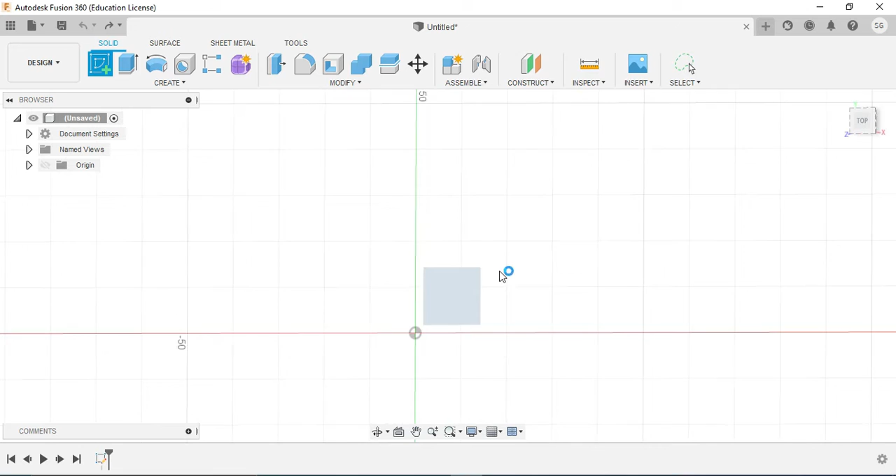Open Fusion 360 and go for create a sketch. Now select the plane. Suppose if we select here, this is the top plane. You can also select from here - this is front, right, top. So we need the top plane here, so select on the top plane.

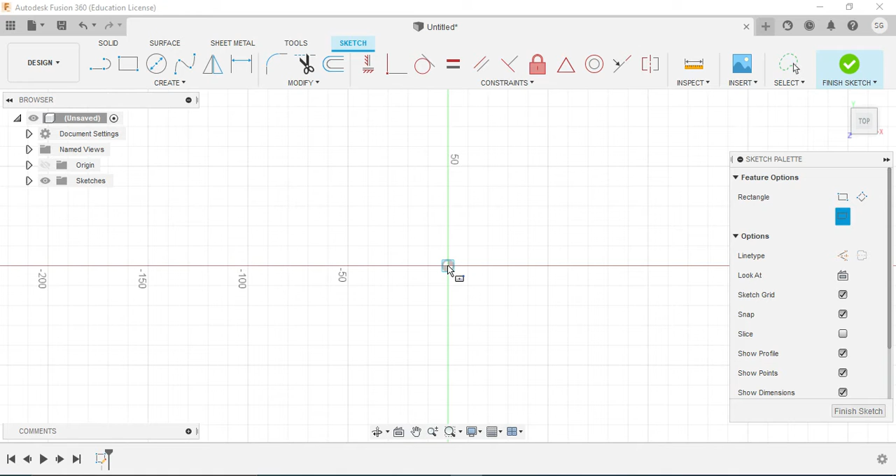Now go for the rectangle. This is a 2 point rectangle, 3 point, and this is a center point rectangle. Select this center point rectangle and click on center, and the dimensions are 44 by 34.

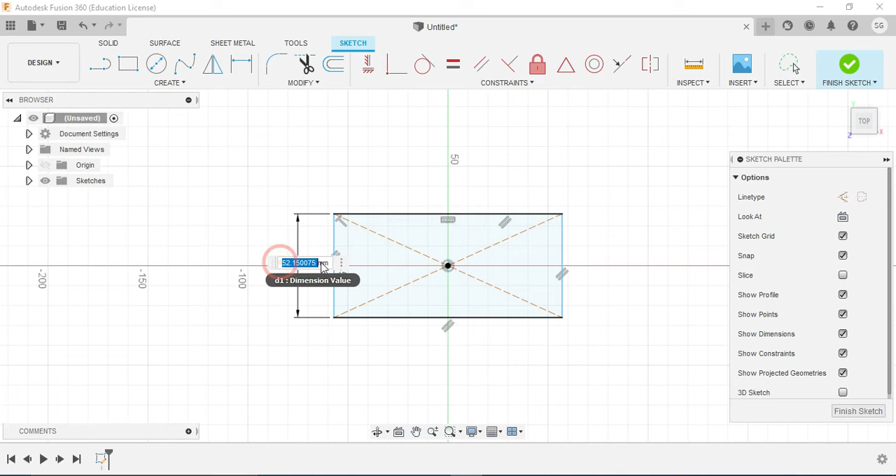Right click and go for sketch dimensions. So this is about 34 mm, and this is 44 mm.

Now go for the finish sketch. Go for the extrude, and the thickness is about 6 mm. So give the thickness 6 mm.

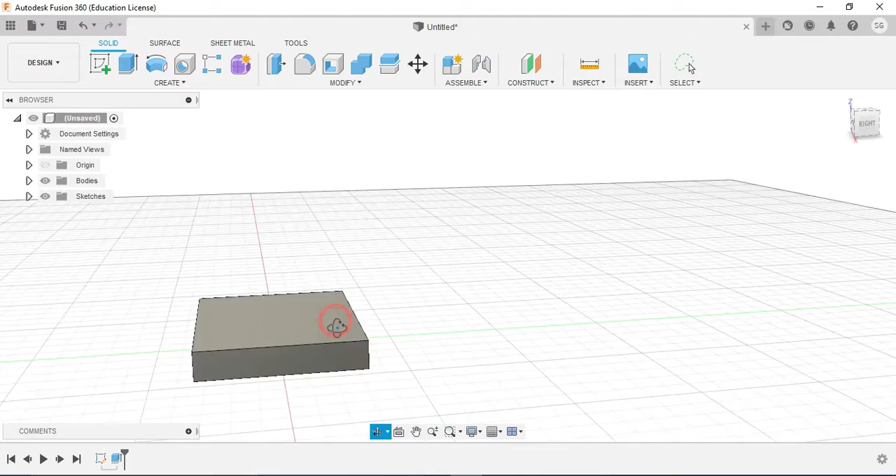Now click on this orbit option, and press and hold the left key of the mouse and drag the mouse to rotate this model 360 degrees. Now just press the scroll button to disable this orbit option.

Or unselect that. Now we need to make these two ribs of 8 mm thickness, and the height is total height 48 minus 6, that is 42. So 48 and 8 here.

Go for the sketch and select this surface. Go for the rectangle, select here and this two, right click on it and go for sketch dimensions.

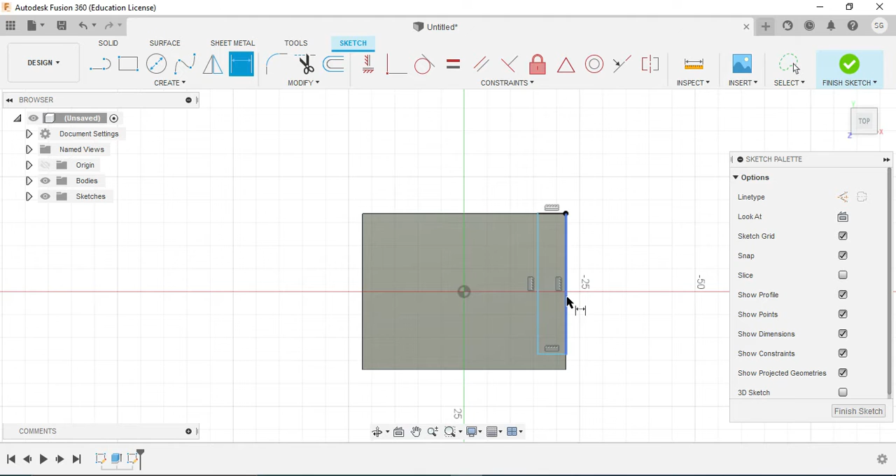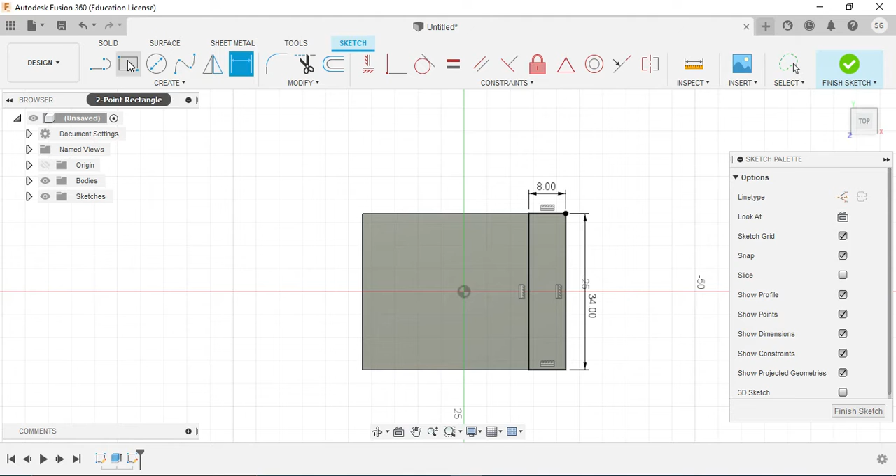Okay, this is 34, and this is about 8 mm thickness. You can also mirror it.

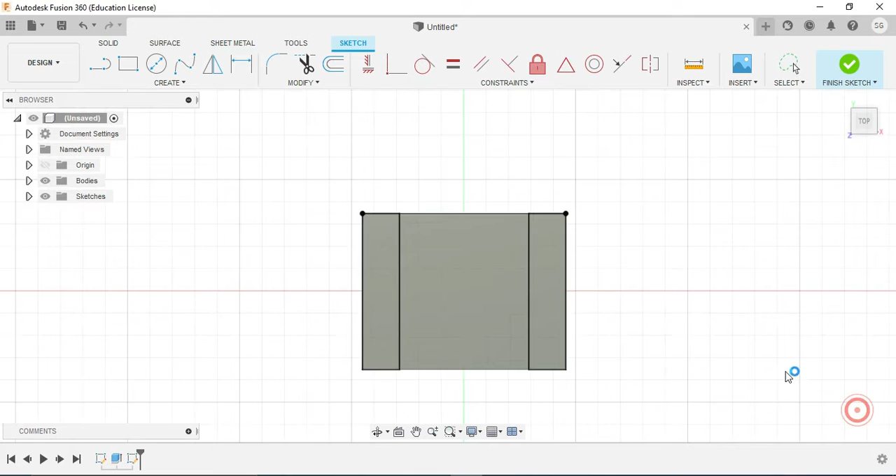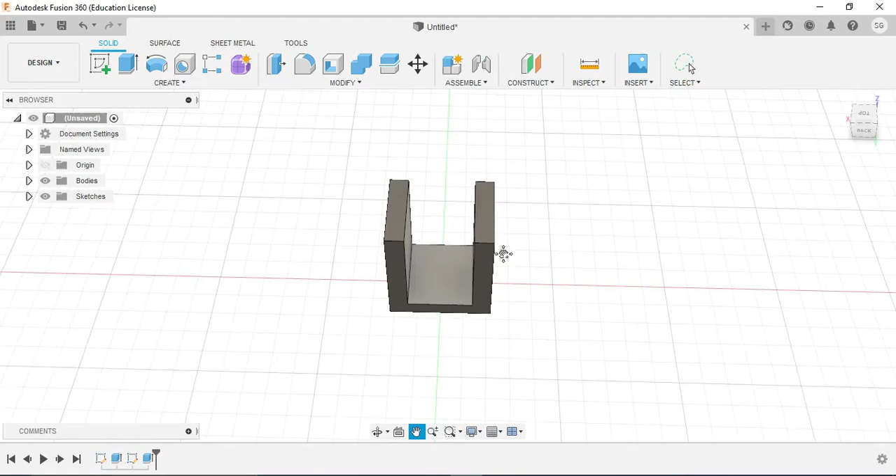Now go for the extrude, press Ctrl button and select these two ribs, and select on the extrude and give it 42 mm. To just drag it, press the scroll button and drag the mouse to drag this component or the solid.

Now we need to make a circle here or hole. So just to see the diagram, from the bottom surface it is 20 plus 6, that is 26 mm height, the center of the circle.

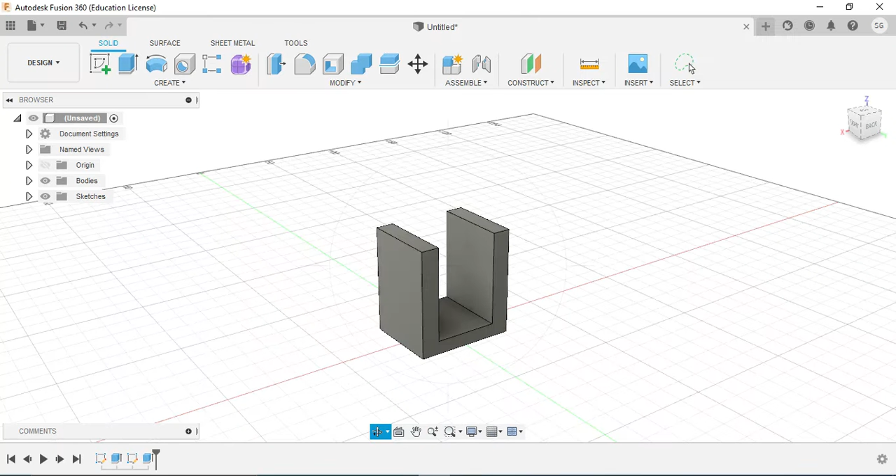So go for create a sketch, select this surface and go for the circle, and the diameter is about 24 and 14 mm.

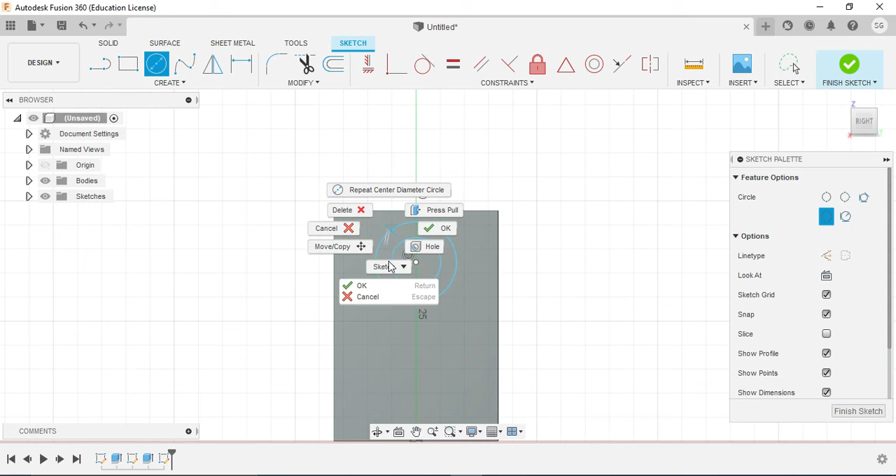Right click and go for sketch dimensions. This is 24 and another one is about 14 mm.

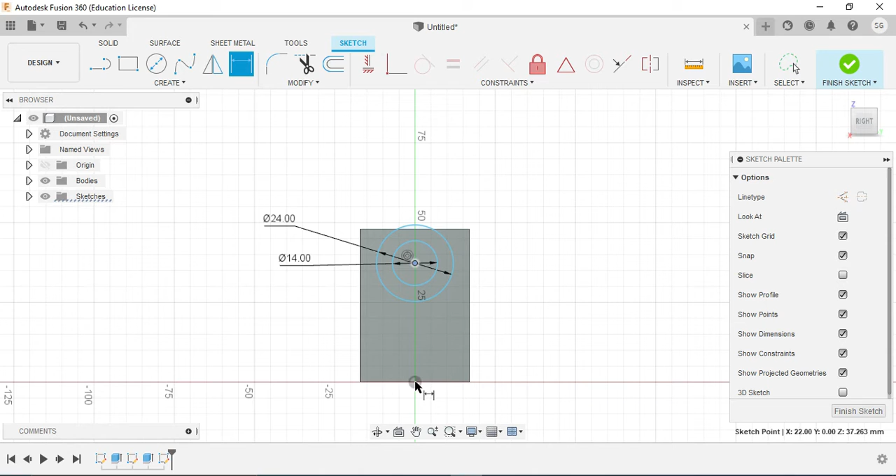Now select this center of the circle and the bottom line, and this height is 26 mm. Now finish the sketch.

Now go for the extrude, and the extrude is about 13 mm.

So there is no hole, we need to make the hole. As you see here, there is a hole. So select this surface and go for the extrude. Even though give the dimensions, suppose 8 mm, or just hold this and drag this to make the hole.

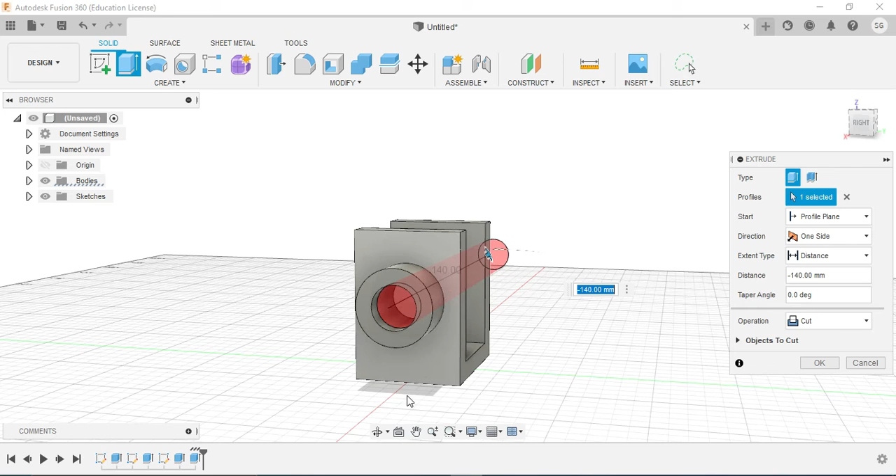See, or just give the through hole. You can see here all. Extent type is just give the all, or till to object. That's according to our requirement.

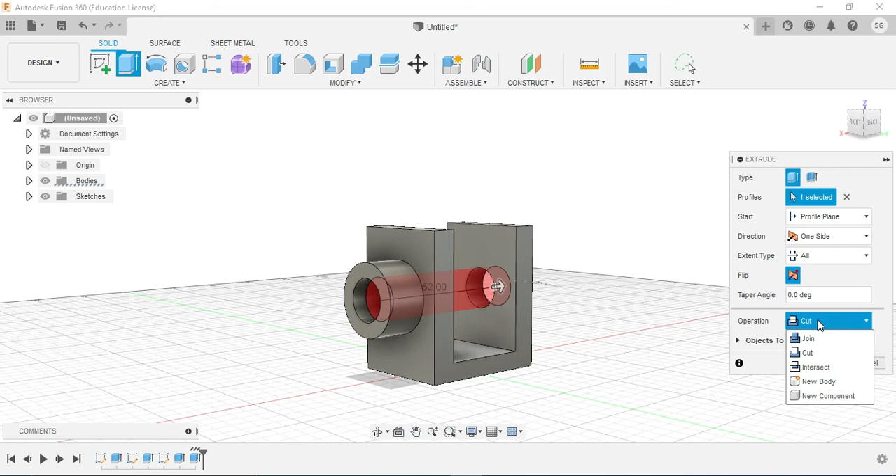Just use that. And okay, even though if you need to make this solid, just use the operations as join, cut, intersect, new body. So we are going to remove the material, so select the cut option and okay it.

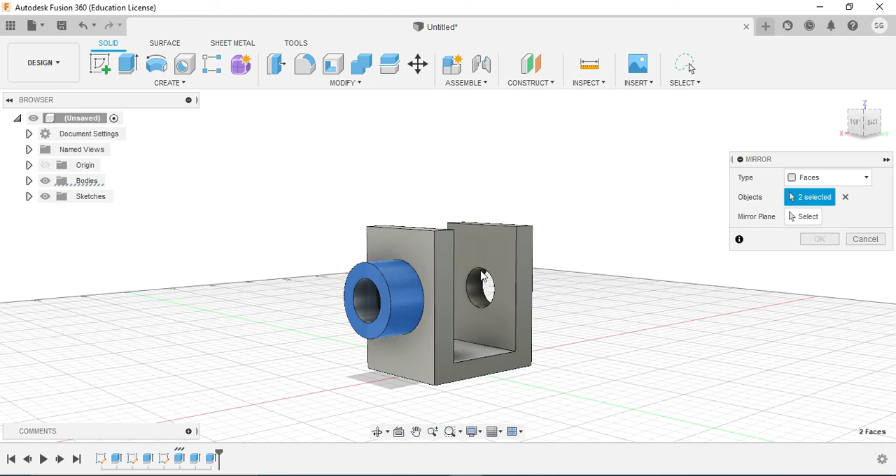Now suppose we need to make this on the other side, this circle on the other side. So select on create and select on mirror, press Ctrl button and select these two faces, and now select the mirror plane. We need to select the plane to mirror this object. So select this plane, vertical plane.

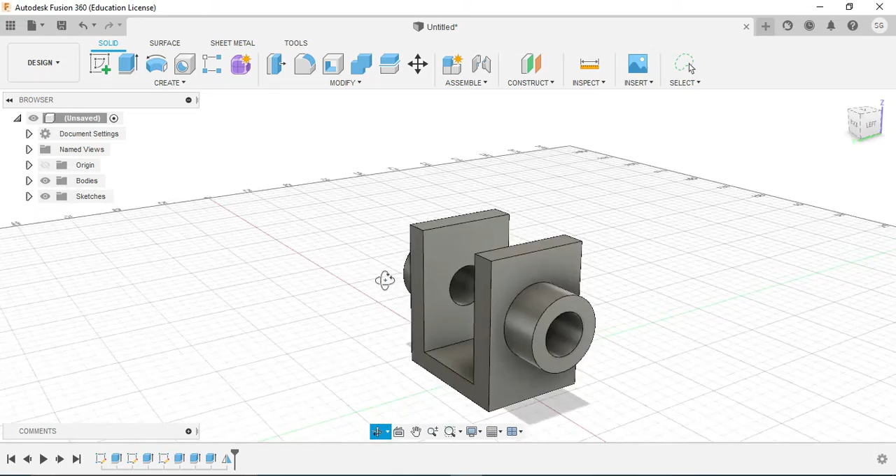Now you can see here this circle is mirrored. So our solid diagram from this is completed.

Even though you can use fillet, here there is an option fillet. So select this edge and suppose give the dimensions according to your requirements. Suppose I am giving here 15 mm.

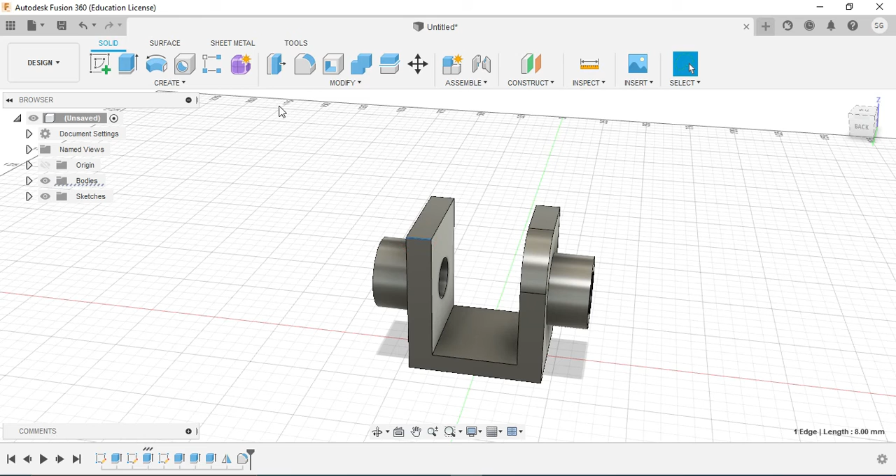Just press Ctrl button and select the four corners at a time and give the dimensions. Suppose if you need equal dimensions, suppose 15 mm, then select four edges by holding the Control button and give the dimensions.

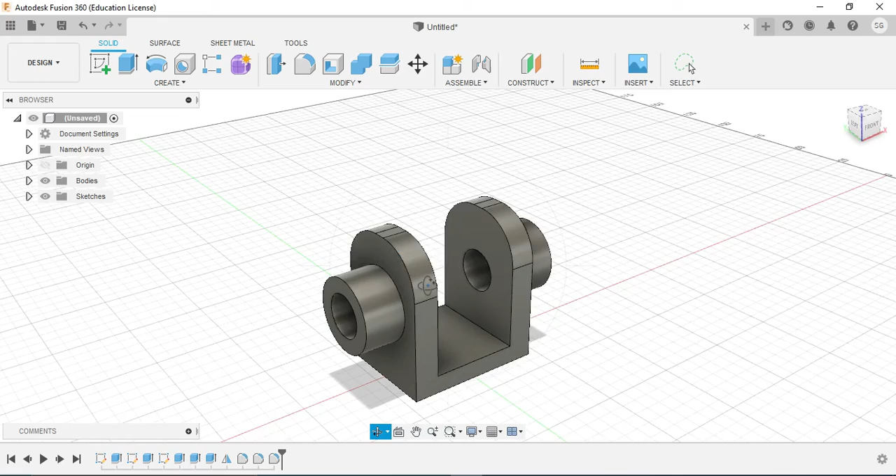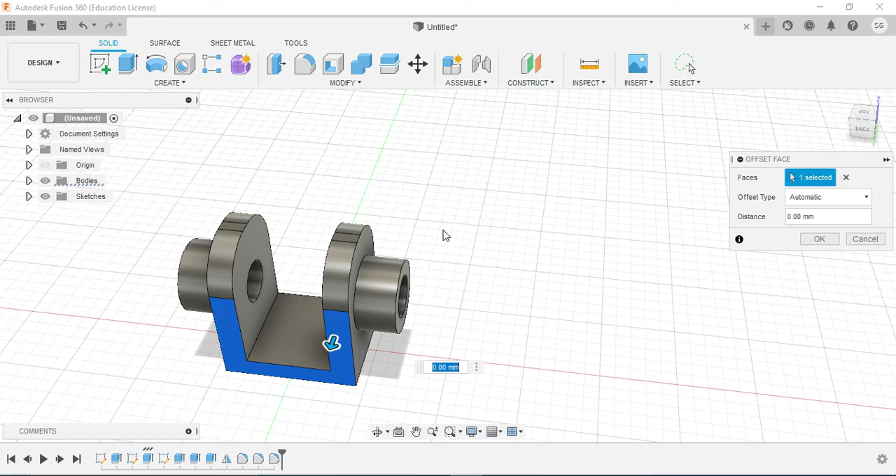So this is about fillet, and there is also press pull here. This means to extend this body. Suppose you need to extend it or decrease the thickness. So we didn't require this thing, cancel it.

And so this is a shell. Select, suppose, select this base and give the 2 mm thickness, right? So you can see here a shell is created.